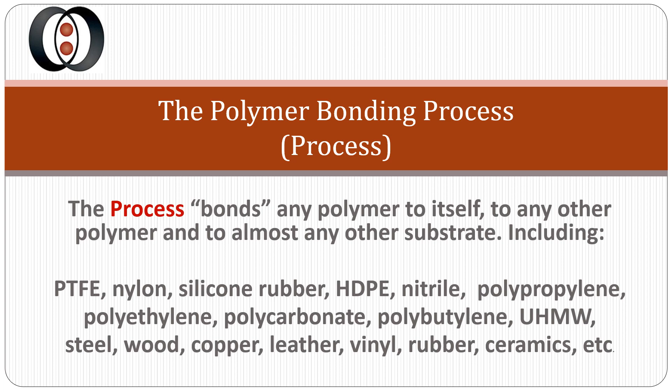The process bonds any polymer to itself, to any other polymer, and to almost any other substrate. Substrates we can bond include PTFE, nylon, silicone rubber, HDPE, nitrile, polyethylene, polycarbonate, and common substrates like steel, wood, copper, leather, vinyl, rubber, ceramics, and more.

The process bonds; glues and epoxies glue. With bonding, you have a sharing of electrons. With glues, you have a sticky substance holding two different surfaces together. That's a big difference.

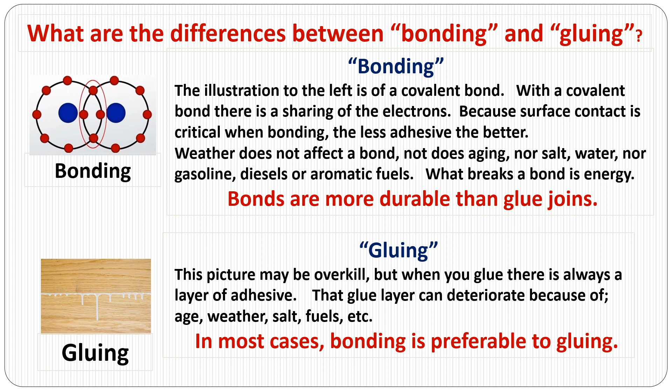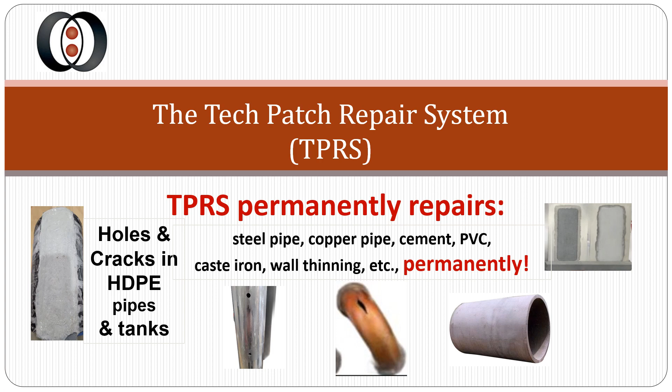The Tech Patch Repair System permanently repairs holes and cracks in all commonly used pipe and tank substrates, from HDPE pipe to steel, copper, PVC. When it goes on, it does not come off.

The Tech Patch Repair System is a game changer. You don't have to replace steel pipe when it's damaged—you can repair it. You do not have to replace HDPE pipe when it's damaged—you can repair it. Wall thinning can be corrected with the Tech Patch Repair System, saving time, saving money.

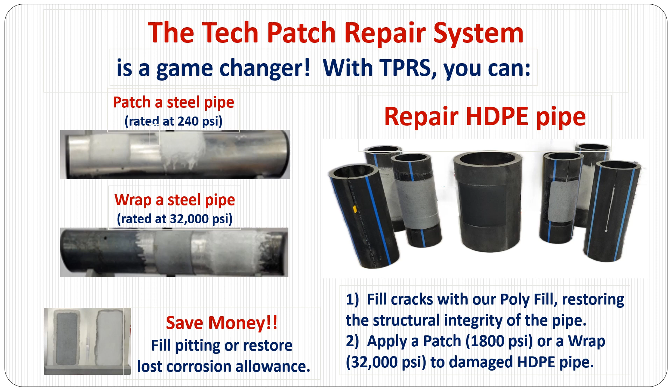The polyfill is an integral part of the Tech Patch Repair System. With cracks, placing the polyfill in the crack will restore the structural integrity of the pipe or tank. The polyfill can be used on steel pipe or HDPE pipe to add surface area. Adding surface area increases the strength. Polyfill can also be used to restore the corrosion allowance in the steel walls of storage tanks.

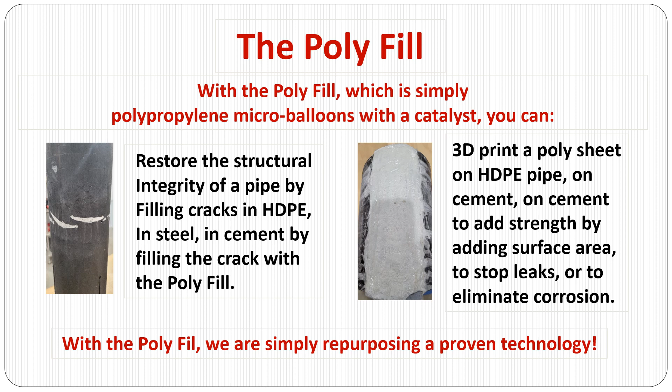The process, TPRS, and the polyfill are all proven technologies. They've been in the field for 7 years and subjected to a number of engineering tests. Most of all, they work.

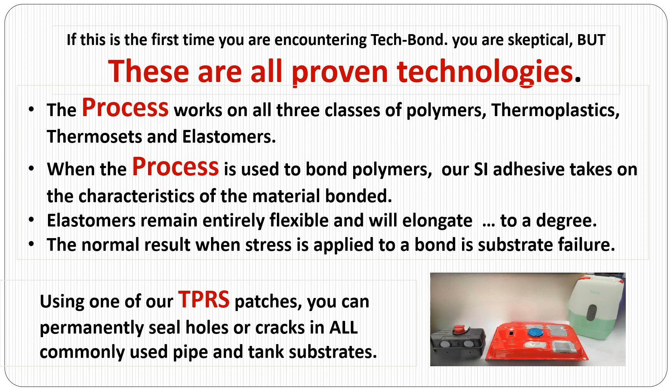What's our proof? With the process, it's been tested over the last 7+ years by individuals, engineers, and scientists around the world. It has passed every test. The process has well over a 99% success rate. It has been incredible. TPRS is a little bit different story.

Let's first talk about HDPE. Most of our sales have been to individuals repairing HDPE tanks and HDPE pipes. It does a superb job. It also works on steel pipes.

With the polyfill, it will restore the lost corrosion allowance, as we've said. The engineering reports we have, ISO 1167, measure with HDPE pipe the internal water pressure it can stand. With TPRS added to a 4-inch SDR11 HDPE pipe, the pipe withstood 1800 psi until it blew out.

In ISO 13479, which measures whether cracks propagate under a repair system, they did not. The cracks did not propagate with TPRS.

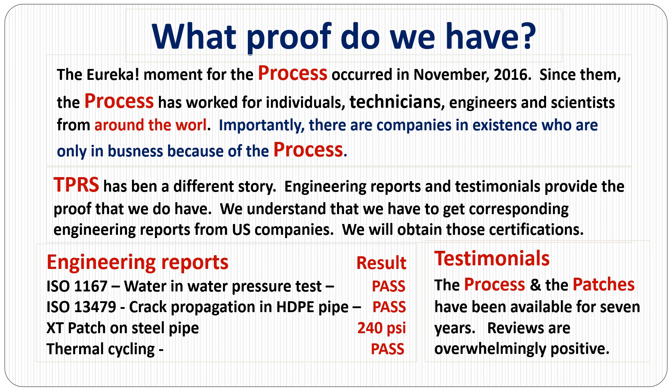We have a number of testimonials. We receive them regularly. You can check on Google, on our website, and on several messaging boards on the website.

Let's think a minute. We've got two new technologies: a way to bond polymers, a way to combine polymers into more useful solutions. New technologies solve problems. New technologies save money. New technologies make money. There are companies in business only because of the process, and they're making money.

In doing some research, I found the answer to the question of where most new innovations come from. They come from small businesses. We're a small business with two amazing technologies, and actually more to come.

TPRS will save the economy millions, industries millions, companies millions. At the top is probably the oil and gas industry, which spends $1.8 billion a year on maintenance. Much of that is spent on replacement of pipe and replacement of tanks.

One of the reasons is none of the repair systems on the market will repair a problem when it's small. They're just left to get bigger. With the polyfill, you can repair a problem when it's small by 3D printing a poly sheet onto the problem.

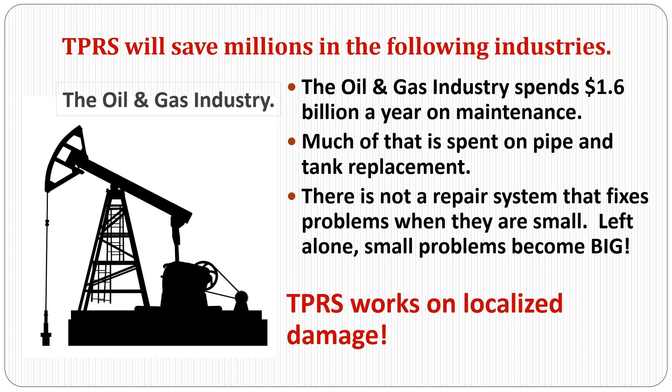TPRS repairs localized damage. Another industry, actually a $2 billion a year industry, is sewer pipe repair. By repairing, in today's terms, what is meant for sewer rehabilitation is relining the sewer. They have to reline the entire sewer because there was no way to repair the localized damage.

Our Poly Fill will bond, with the process, a poly sheet on the localized damage, extending the time between the necessity for relining the pipe. One of the engineers at a major sewer rehabilitation company told me that the Tech Patch was the best tool that he had in his toolbox.

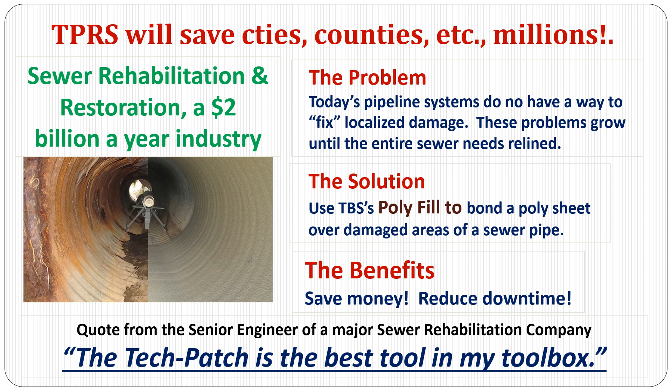Other industries that will save substantially with TPRS: one is boating. We are actually, within the next month, going to resurface the bottom of a boat, a plastic boat. That will save tens of thousands of dollars.

Farming—farmers have leaks all the time. A Tech Patch will fix that leak quickly, easily, and most importantly, inexpensively. To emphasize, quickly and inexpensively.

Then transportation. The semi-trailers you see on the road develop leaks all the time. A Tech Patch will seal those leaks and prevent the damage that occurs regularly to the material inside of that semi-trailer.

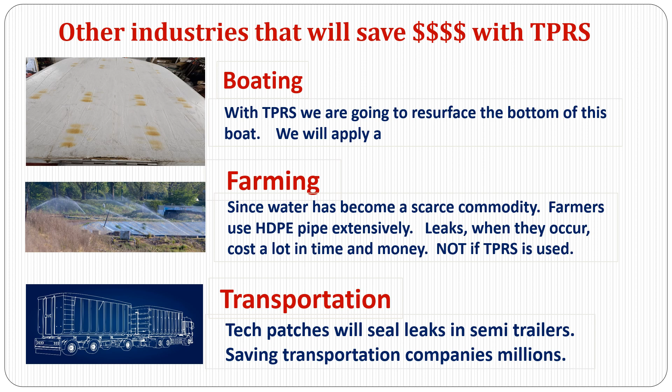Tech Bond Services is our services arm. What Tech Bond Services will do is, first, we will send a trained team on site to repair your damaged problem—everything from restoring the corrosion allowance, to repairing leaky pipes, to wrapping pipes.

The second thing services does is to train your personnel so that they can repair the damaged pipes and tanks with the precision required.

You might guess that using molecular bonding is an entirely different process than gluing or epoxying. If you guessed that, you would be correct. There's a precision required in generating a molecular bond. That's not part of using a sticky substance to hold two things together.

We will train your people, we will certify your people so that they can do the repair that's needed, and you will save having us come on site. But since this is a new technology, we're also learning things almost on a daily basis. We will share those things we learn, the tools that we develop, and the information that we have with all of our certified technicians.